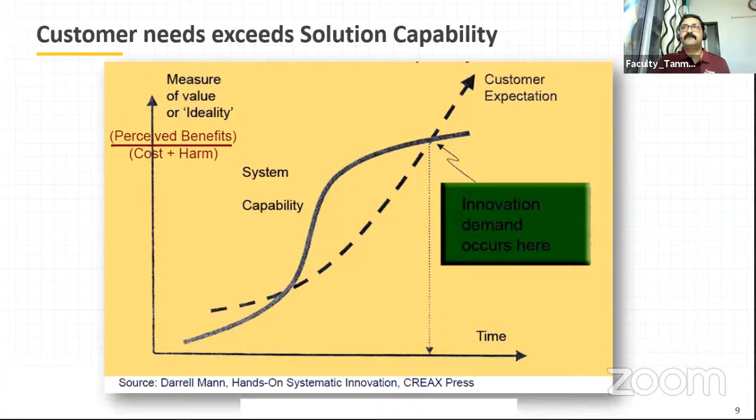And this is what happens - the customer expectation always grows that the product will be continuously improving. But normally what happens is that overall the quality of the product declines or flattens out over the period of time. This is where we need innovation, that second kick or second booster of the rocket, to give the next thrust to go to the next level with that innovation. So innovation is extremely important everywhere. Every company is going behind innovation and new digital technologies.

So product development process is, we have to first of all, till now, is there any question, Deepak sir? Am I going too fast or too slow? Yeah, it's okay, sir.

Product development process basically needs to start with a customer viewpoint: what is their perception about a product, what kind of improvement they want. This is a market study that needs to be done, initially inspiring the visioning of a new product. Then we also need to understand if I create this product, whether it will sell in the market.

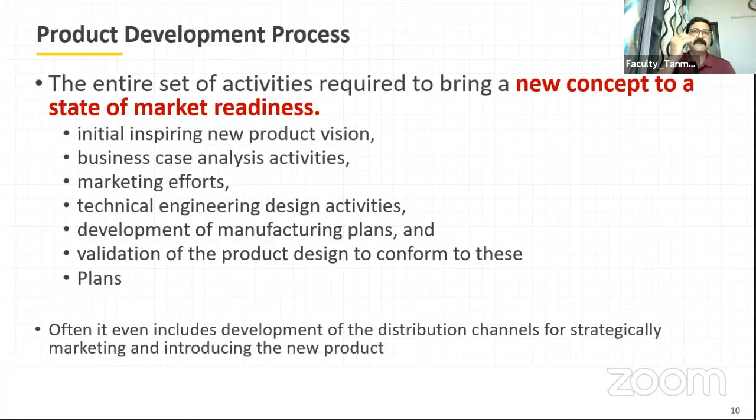That is the business case and analysis activities. Then we need to understand what kind of marketing efforts we need to put behind it to sell this product. Then obviously the technical engineering and design activities, that is the core of any product development. And obviously the manufacturing plan - whatever I dream, it has to be manufacturable. So the manufacturing plan, product design validation, and everything comes in. Those are some granularized points for product development.

Now, higher quality at lower cost. Quality has to be absolutely 100%, that is by default. Everybody wants quality to be absolutely default, 100% quality, but the cost also has to be very, very competitive. So that is the second point.

And the third one is that you cannot take 2 years or 3 years to meet all those criteria - it also has to be very, very time bound. So within 6 months a new car has to come out. These are all very challenging scenarios for a company to sustain in the market. So what do you do?

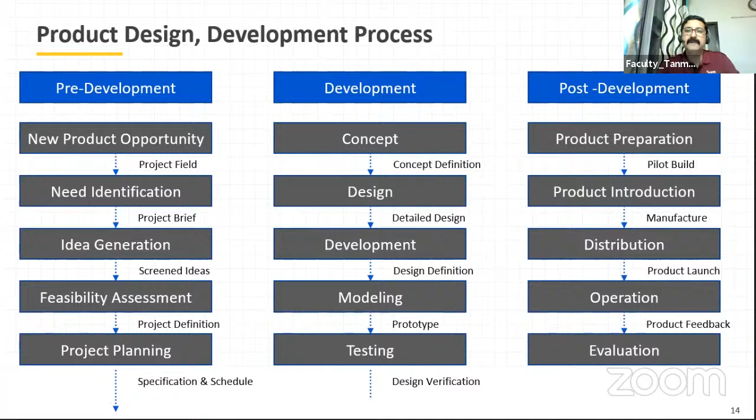Till now there's a lot of text I'm just reading. I have a few beautiful videos coming up which will make people a little interested in this.

Now this slide is also very important, it's a very favorite slide for me: this rising sun casts the longest shadow. Where we need to put our maximum effort in the entire product development cycle is the first design phase.

The more robust design we do in CAD, CAE, and the more time we spend on our drawing board to finalize with iterations to make sure our design is robust, the less money we will spend in prototyping or physical testing or field failure and other future problems.

Just like building a kid's career or his foundations - the more time you spend with him during his initial 7 or 10 years period, that builds his mind. That creates a kid's future.

Similarly, for a product, the initial design stage, the drawing board and the simulation designs - the more time we spend there, the more benefits we will reap in terms of money, facing fewer challenges in the future. Our products will not fail, it will be more robust in the field, fewer customer complaints will come. So this is most important, that in the design phase we have to spend more time, and that is where CAE - computer aided engineering - will come very, very handy.

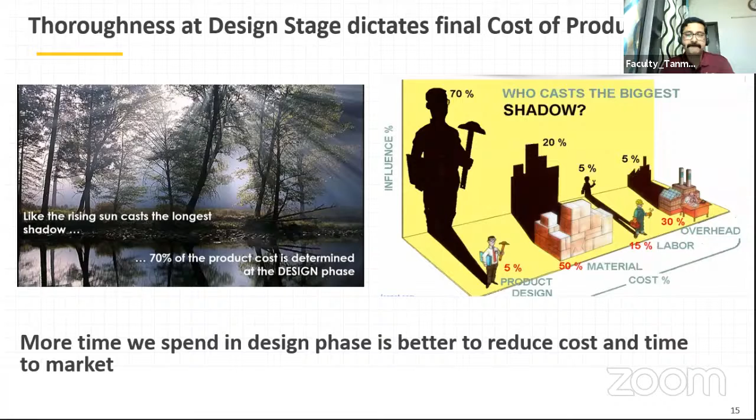Okay, and this entire process is called product lifecycle management. It's kind of an entire cycle. See, I will tell you a very small example.

This entire aeroplane, any kind of Boeing jet or Airbus, doesn't get manufactured in a single facility. One of the components may be the fuselage or the wings. Everything comes from different locations of the world. The entire wings come from Germany. The center portion gets built somewhere in Australia. But everybody is extremely synchronized, so that not even a single millimeter of difference will happen, while all the components come back to the US and get exactly fitted together to make a big aeroplane.

So that is what product lifecycle management is all about - it's a coordination, a collaboration between different teams, allowing teams to work accurately in different locations, and how to reduce effort and money for data creation. PLM is a very important process in the entire product development. It's called product lifecycle management.

And the historical view, how this PLM has evolved over the period of time: 3D CAD analysis in 1995, the first analysis we did.

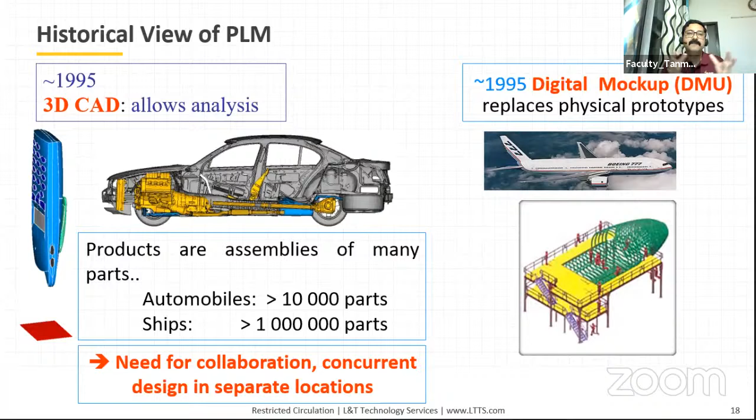We will definitely do the prototyping, we will build this car, but we will not build 50 cars. Previously it used to happen - we used to build 50 cars because we never had the technology. Now we have this technology of virtual validation, where we virtually create a mathematical model and simulate it.

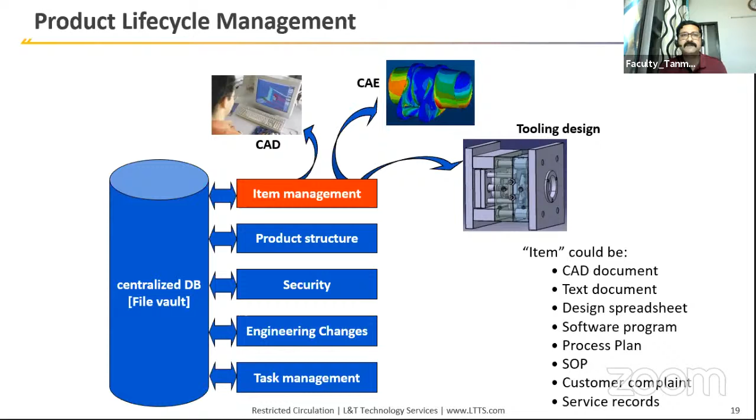Now we have a central server where we have the CAD process, CAE process, and tooling design, everything. In the centralized database, the file vault, it's all secured: item management, product structure, engineering changes, task management. So this entire thing is product lifecycle management.

Deepak sir, till now it is okay, or any question from anyone? Oh, no question, I'll interrupt you. So far it's good. Sure sir. Okay, so I will take one segment here.

Let me take my favorite automotive segment, and I'll try my level best to explain how a product development happens in automotive.

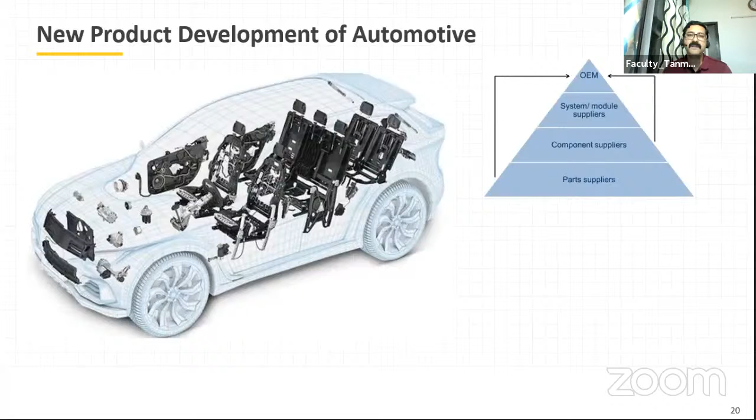In automotive, you can see the bottom of the pyramid is the part suppliers - that is the flattest of all, all the components supplied from tier 3 companies. Then the component suppliers, tier 2 companies. Then the system and module suppliers, the tier 1 companies, and then the OEM. They all get combined or assembled together.

Okay, so it all starts with a beginning, a sketch, ideation - it's a sketch in the drawing board. The designers sketch the model, and with a clay model, they create this car.

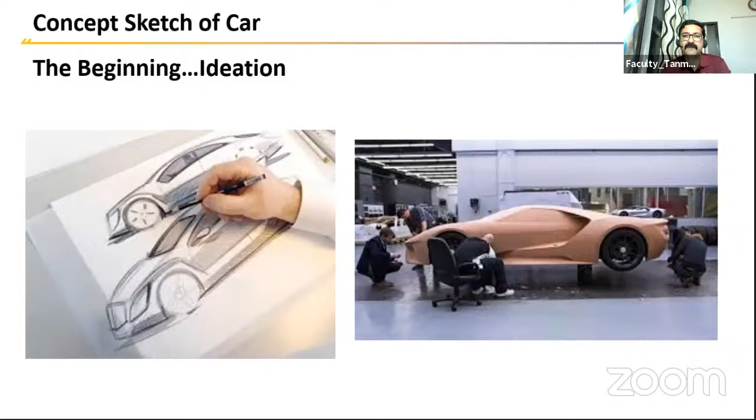After that it goes straightway into the design software - there are a lot of design softwares like SolidWorks, CATIA, Creo. In that they create the Class A surfacing for the entire car, entire model. It's a virtual surface.

Every system is modeled here. You can see the details - the tires, the bonnets, the front end of the car, everything is a completely detailed model.

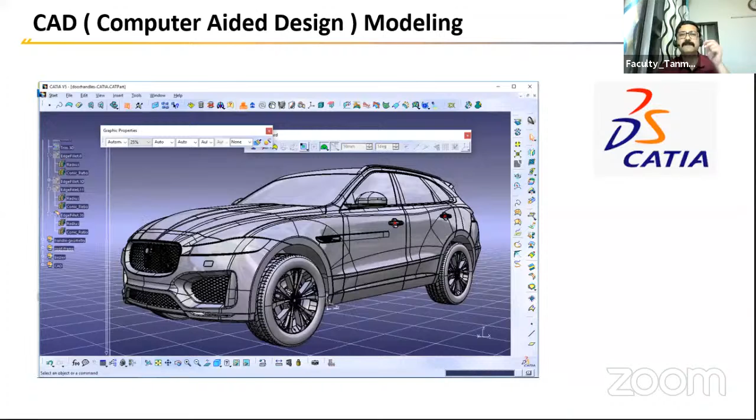So with this particular design, previously what used to happen is they would do some very preliminary analysis and straightway go into prototyping - let us build this car and bang it in the wall, let us test it, what happens, whether it fails, whether it breaks. Jumping directly into a prototype is not a good idea, because it is going to cost a huge amount of money.

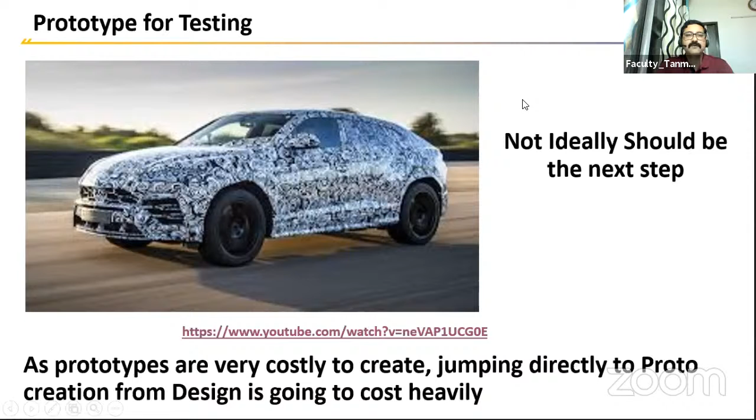You can imagine creating this Jaguar car - creating a Jaguar is almost like spending 80 lakhs to 1 crore rupees. And however many times you want to do testing, you have to spend that much money. So instead of that, I'll just go to a crash testing video over here. Let me see whether it is visible to all of you.

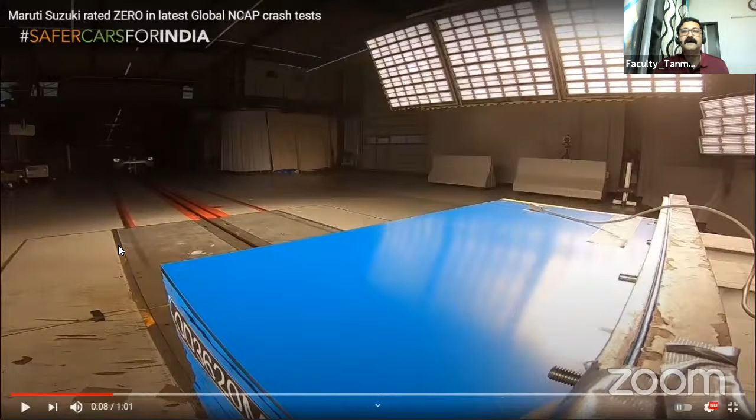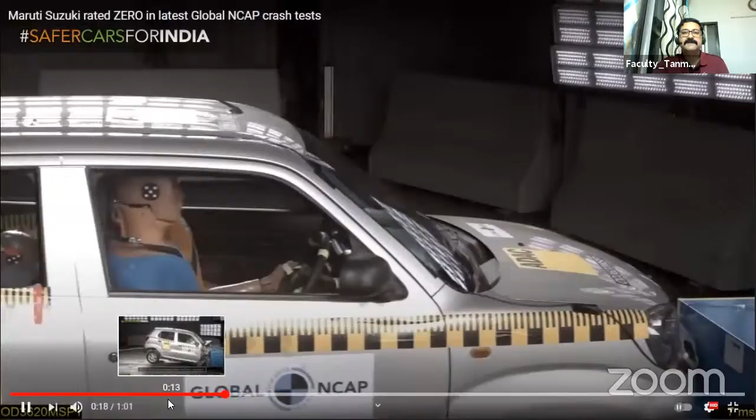This is an offset barrier test. You can see here, this is an offset barrier. It's not a full frontal test with all the dummies, and you can see the airbag deploying.

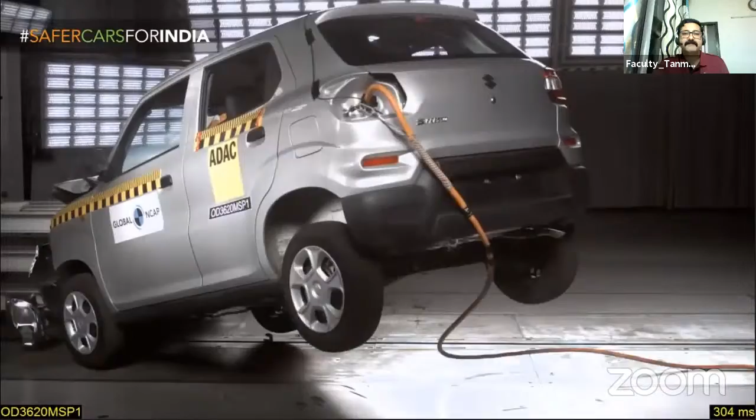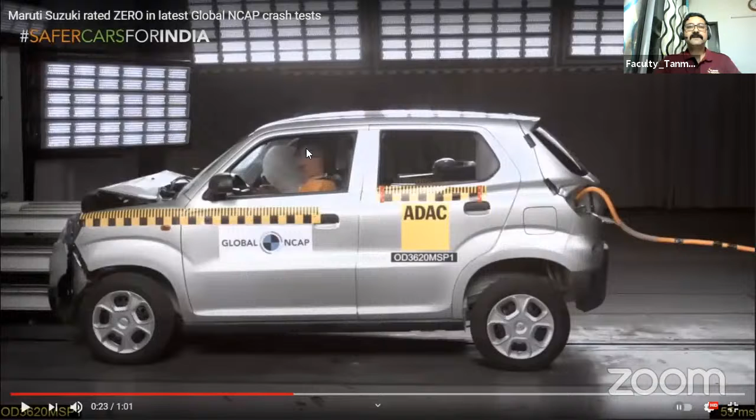So this is how the things are all tested, and these dummies have accelerometers, the output points. We take the head injury criteria and the accelerations from the ribs, neck and abdomen - everywhere the injury is taken out from here. You can see all those points, the displacement and the injury criteria, everything is output from this particular test. This is how an actual physical test happens.

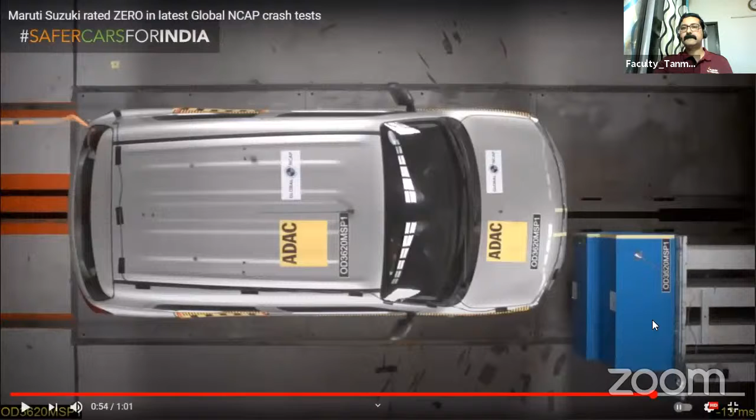So this is a child dummy. You can see this is an offset barrier, right? This barrier is not full frontal, because these are the most frequent accidents that happen - whenever two cars see each other, they try to deviate from each other. That is why this offset barrier is the most frequent impact that happens on the road, and it's also most severe, because it takes only one portion of the car. The rest of the car is not taking any energy - all the energy is being absorbed by this particular portion. That is why it is an extremely severe load case.

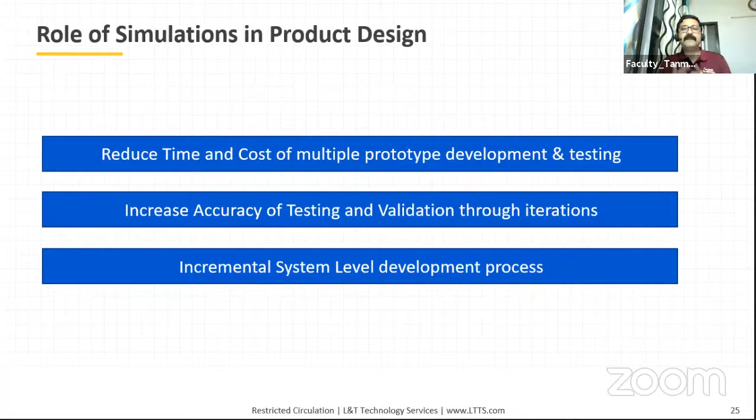After that, they will create a prototype. By that, they would have saved almost 20-30 prototypes, almost 3-4 crores of rupees they have saved. And they can do it in a very quick period of time because building a prototype is very difficult.

So initial design, then simulation and validation. Designers and validation engineers talk to each other. They have to be absolutely collaborative, because designers give a design to a CAE engineer who validates that model, suggests changes to the design engineer who quickly incorporates those changes into the model, and again gives it back to the simulation engineer. So this kind of to and fro collaborative environment generates a robust design, and then they finally go for physical testing and prototype.

So that is why we call it product development powered by simulation.

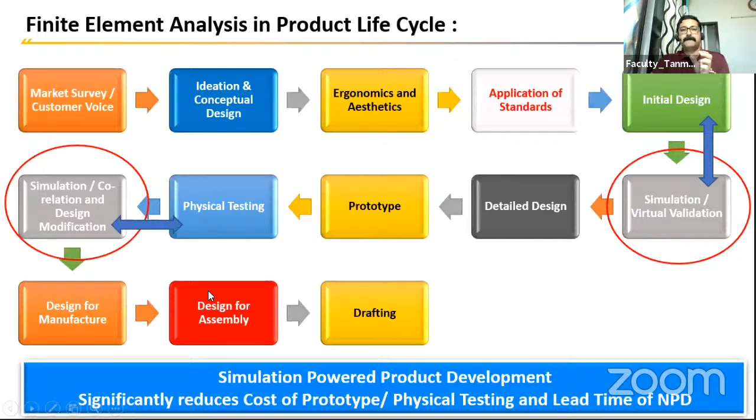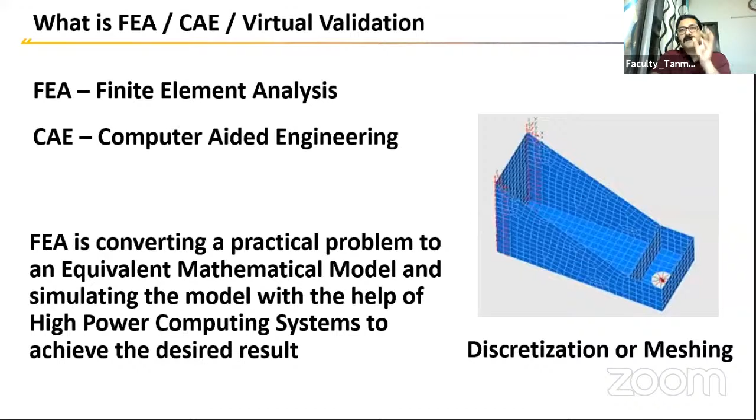So finite element analysis - see this particular bracket, it has been beautifully discretized into small elements. These are all called elements. There is different software available to create those elements, called HyperMesh. Many of you might have heard about it. It's a very popular technology. Automotive industries have been using it for the last 20 years - extremely popular technology, this FEA technology, to create a mathematical model of a physical object and simulate it with all the

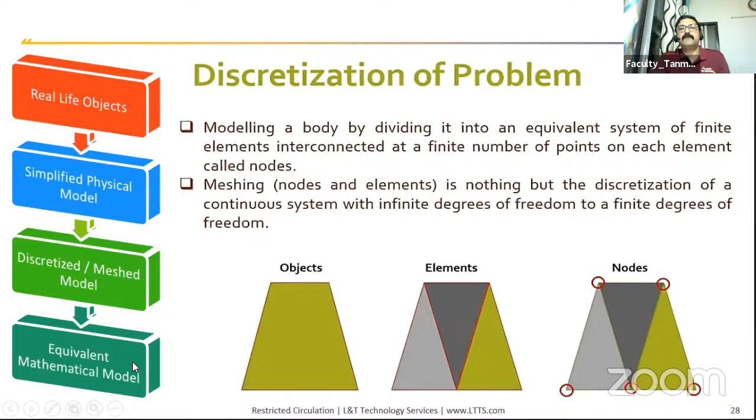reality level loads and boundary conditions, and simulate the reality of how this particular component will behave. So real life objects, physics simplified into a physical model - that is the CAD data, and from the CAD data we discretize into a meshed model, an equivalent mathematical model. Not going too deep into technical details here. So this is how a car is built, meshed into hypermesh - you can see here hypermesh. This is how a car is built in a hypermesh environment for the rest of the simulations.

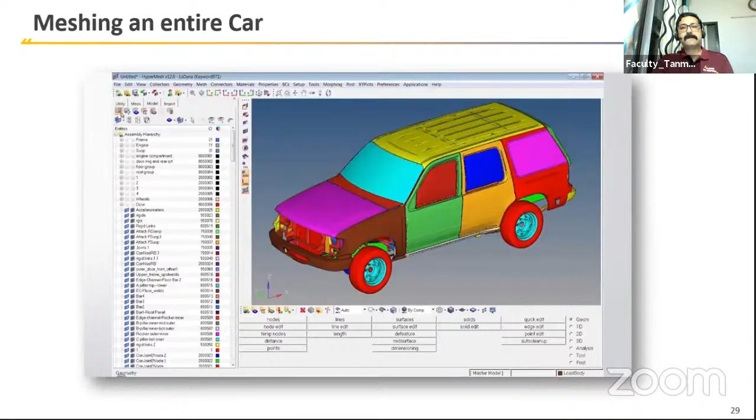Okay, till now any questions from anyone? No, it is going well. Okay sir, thank you sir.

So now for FEA, for the simulations, what are the different types of very common simulations? There are n number of simulations we can actually do - linear static analysis, all different types of simulations we do. But the very favorite, well known simulations are correlated with the familiar failures that we see around us, like fatigue simulations. Fatigue simulation is what? It's repetitive loading. When a car goes through repetitive ditches, it does a repetitive loading, and you can see that if you

take a simple metal plate and do this repeatedly, it will easily break. This is called repetitive loading. So this repetitive loading accelerates the failure. We simulate a fatigue simulation and try to understand what is the life of the component. There are two different types of fatigue - one is low cycle fatigue, one is high cycle fatigue. Normally in our life, what we see is low cycle fatigue. In that, the failure aggravates, it accelerates.

In normal conditions our component doesn't fail, nothing fails, but if it experiences repetitive loading, a fatigue loading, it fails easily. So we have to simulate that, and we have to restrict that.

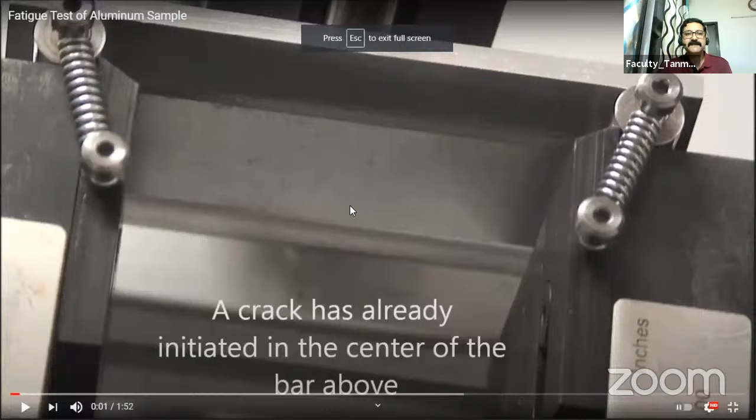Fatigue. So see here, this is a repetitive loading. You can see here a crack will generate in between. A crack is getting generated here because of this repetitive loading on the side. Otherwise, nothing would have happened to this particular bar. But because of this repetitive loading, this crack is getting generated, and finally this component will fail. So this is called fatigue loading.

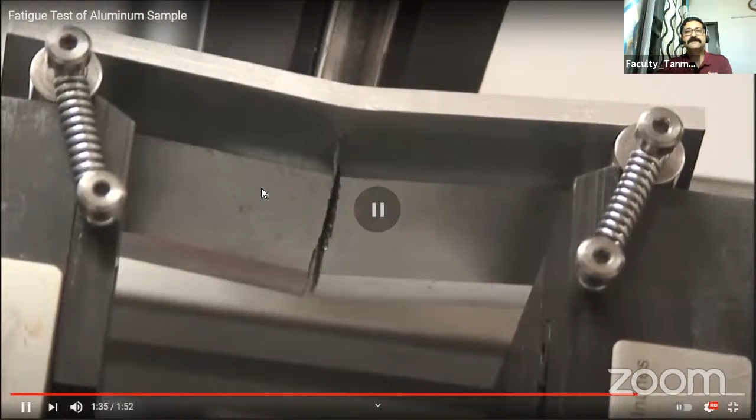Similarly, there is vibration. You can see vibrations in many instances. A tuning fork is a very common example of vibrations—it vibrates. An engine vibrates too. In any car, whatever noise comes into the car, powertrain or engine is the major source of vibration. So we have to reduce vibration using dampers. You can see some rubber dampers at the bottom of the washing machine creating a damping activity, so it damps down the vibration. Those are some of the activities we do in vibration analysis.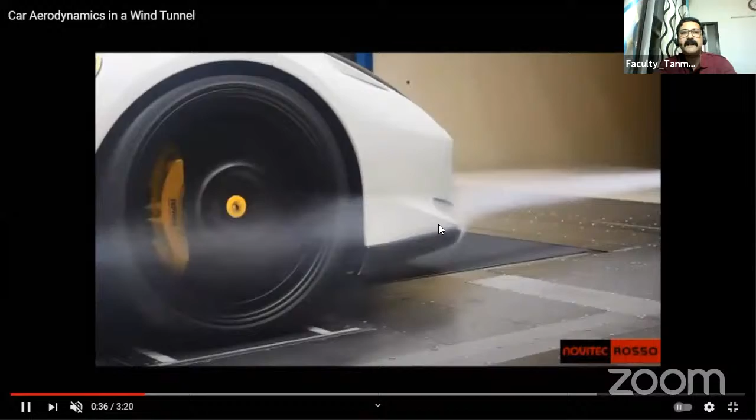This is a wind tunnel test, actually, being done on a particular car, a sports car, just to see how aerodynamic their design is. This is called computational fluid dynamics. There are many other CFD analyses we can do, for example underhood thermal analysis. If you open the hood of the car, the engine gets very much heated, so we need to do an underhood thermal analysis. This is a kind of wind tunnel test to check the aerodynamics of a car.

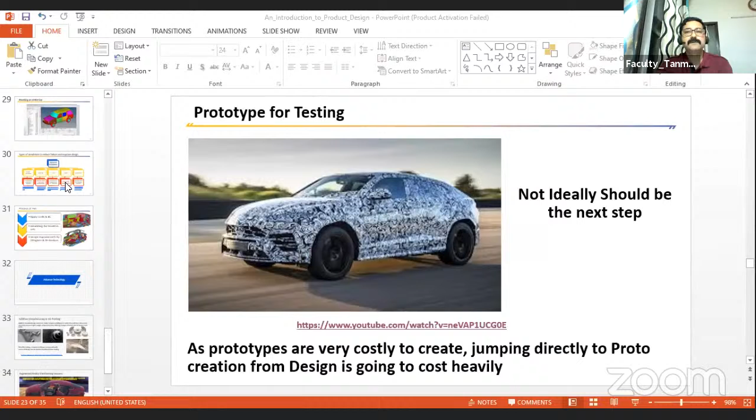Now going back to my PPT. Second one is crash—I have already shown you the crash test that happens, high speed crash impact. And the fifth one is very important: optimization. Everybody likes to make an over-designed component. Anybody has any question?

Okay, can I proceed? Yeah, go ahead. Optimization—so I was talking about optimization. See, for any component or any product, everybody used to make it an over-designed product so that it never fails. We can make it a very thick plate—suppose a car, the side of the car, we can make it a very thick plated car. But it will attract a lot of cost, it will attract weight, and it will reduce your fuel efficiency.

So how to optimize? Have you ever seen Ducati motorcycles? The center structure has some holes inside. Actually, intentionally they have taken out material from a particular piece of metal, so as to make it equally robust yet less heavy. Through those particular lines, the load paths travel—you can see that bridge, right? I'll show you here in this document.

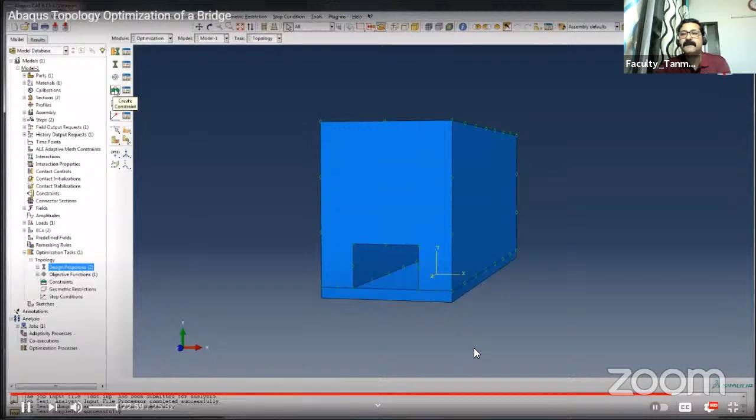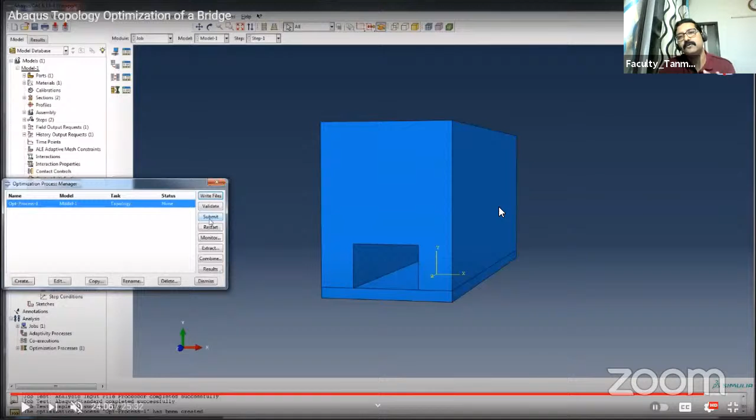This is Abaqus topology optimization. You can see, first of all, they have taken an entire block, a piece, and after that they are optimizing it to make a bridge. See this—this is finally the structure. It comes out like this because the entire material is not needed. The load is flowing through only those paths where you need material. So the software has taken out all the unnecessary material and kept it only wherever necessary. That is how our optimization analysis is very important.

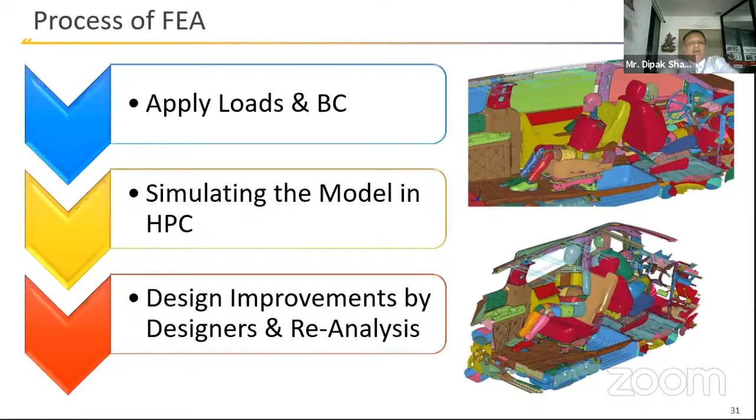So I will just, if I have another 5 minutes of time to cover - I think it's already 7:25 - I'll go to a couple of advanced technologies that people are adopting nowadays. You guys might have definitely heard about it. It's called additive manufacturing, or 3D printing.

So additive manufacturing is that multiple components are being - previously we used to have, you see this plane blade right here - this blade previously used to have 1000 components, with welds, bolts, nuts, everything inside it, and any bolt, nut, hole, anything, those are all stress initiators. From there it will crack. So now what they're doing is manufacturing the entire blade as a single piece through 3D printing technology.

You can see this engine, an aerospace engine - it's all 3D printing technology. So any kind of complex geometry, they will do it through 3D printing. This is one great example of advanced manufacturing that they are adopting very frequently nowadays.

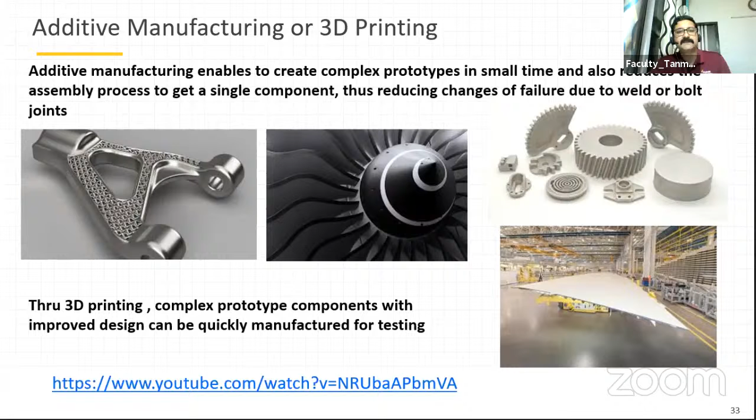Okay, I have one more very small sweet video. Sir, my screen sharing is visible? Hello, yeah yeah, hello.

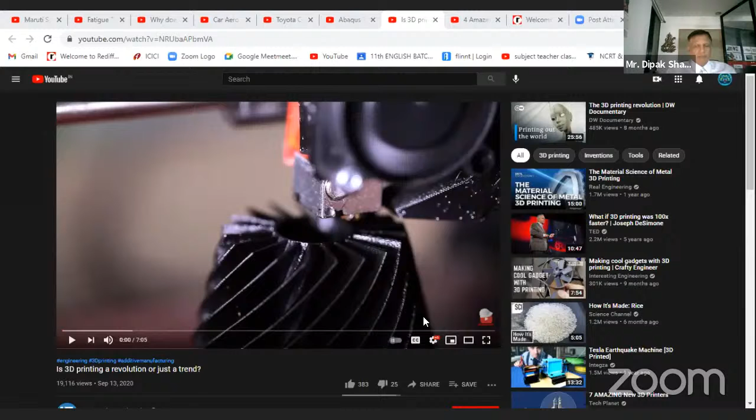What do NASA, McLaren, and the restaurant Sushi Singularity have in common? They have all incorporated 3D printing or additive manufacturing into their work in some form or another.

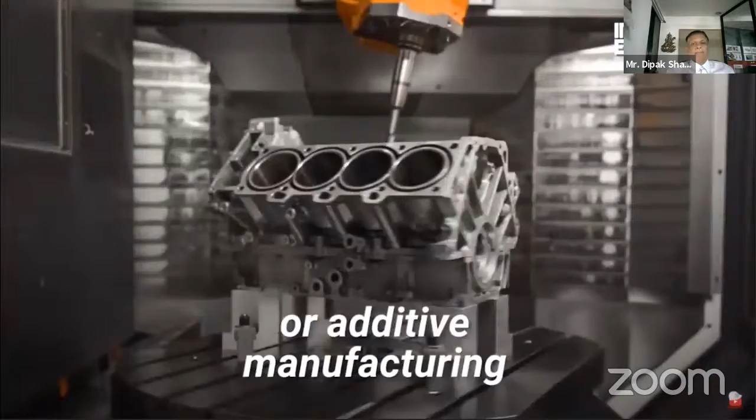Sir, you can hear the sound? Yeah yeah, okay sir, okay sir.

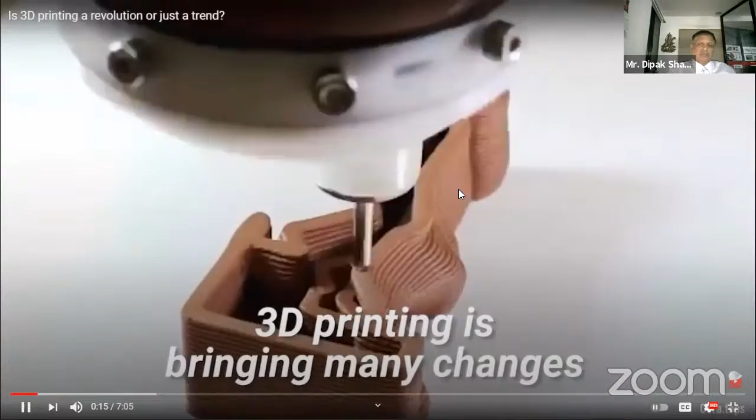3D printing is bringing many changes to a number of important industries. Companies have begun printing everything from fully functioning cars to Michelin-starred dinners. Medical research institutions have even experimented with printing functioning body parts, paralleling some of our favorite science fiction shows.

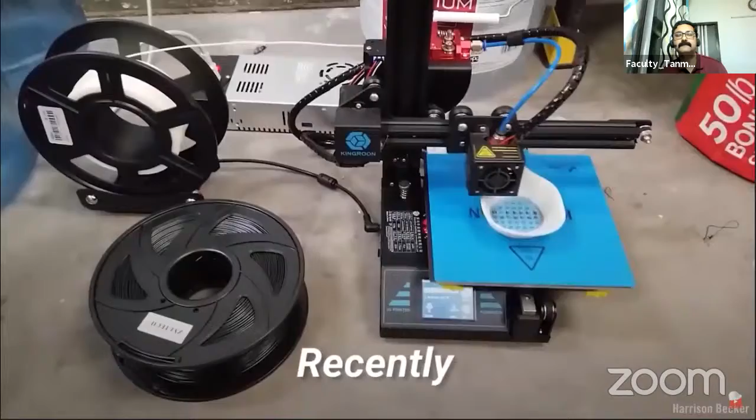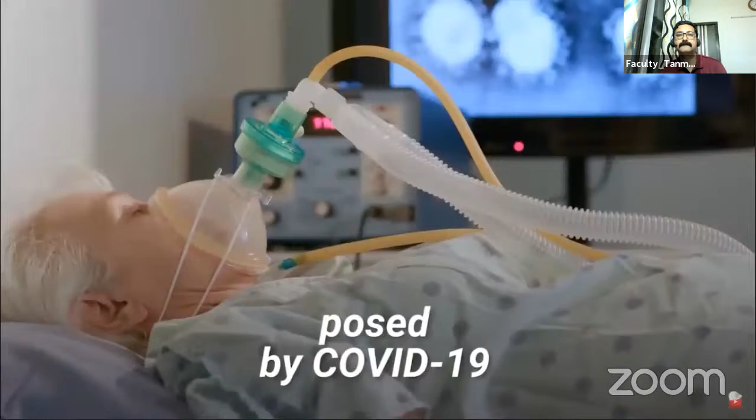Recently, additive manufacturing showcased its practical versatility, becoming a powerful tool in tackling some of the unprecedented challenges posed by COVID-19, helping to supply health workers with personal protective equipment and patients with ventilators.

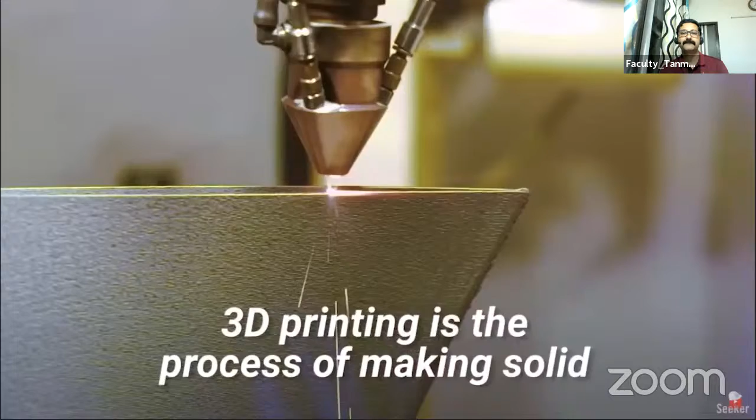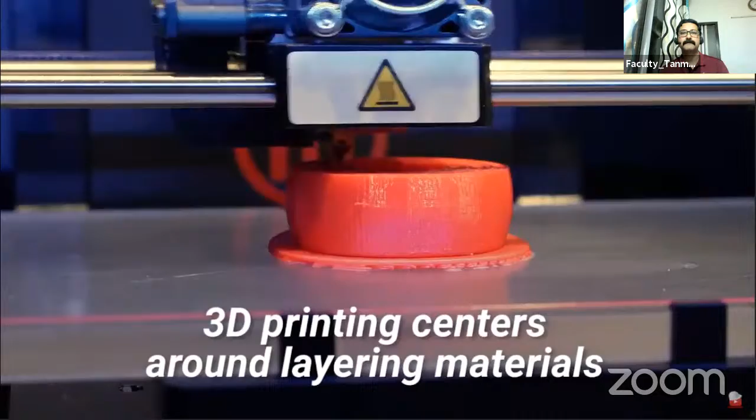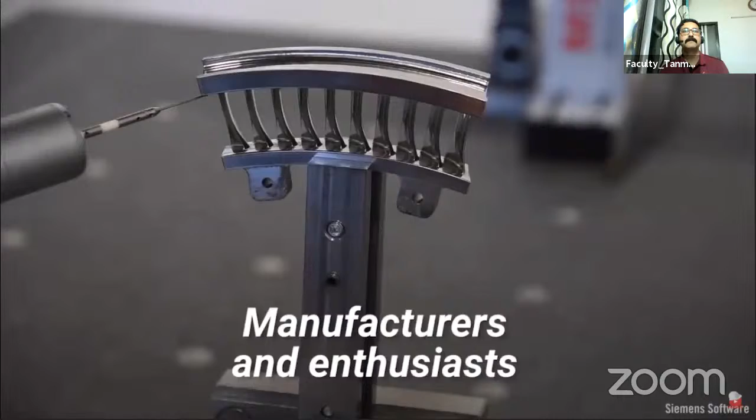So is the 3D printing revolution here to stay, or is it merely a trend? For the uninitiated, 3D printing is the process of making solid three-dimensional objects from a digital file, also called additive manufacturing. 3D printing centers around layering materials like plastics, composites, or biomaterials to create objects that range in shape, size, rigidity, and color. Manufacturers and enthusiasts can print aluminum parts, human tissue, carbon fiber tools, thermoplastic figurines, and even dental models. There are currently 9 basic types of 3D printing, with SLA, FDM, and SLS printing being the most common.

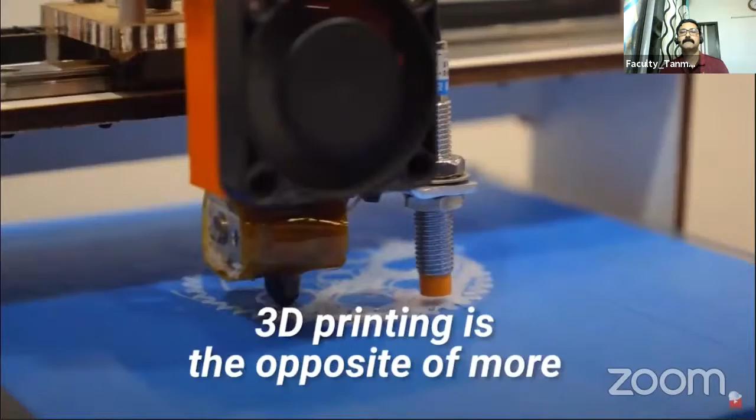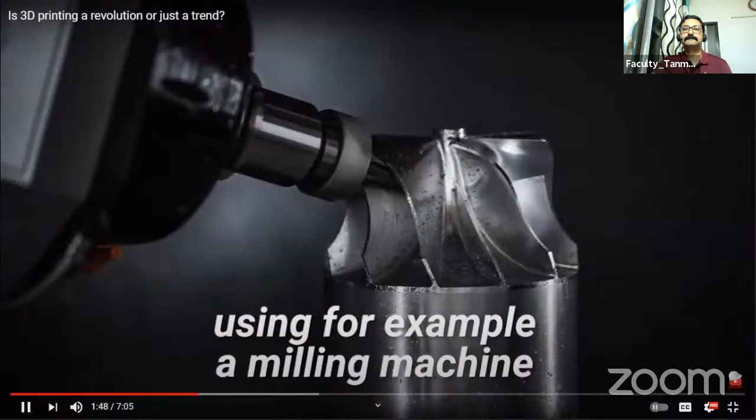3D printing is the opposite of more traditional subtractive manufacturing, which usually involves cutting the final object out of a piece of metal or plastic, using, for example, a milling machine. The first 3D printing technologies may...

Shall I let it continue, or we will stop? Yeah, I think this is good enough.

Okay, there is one lady who has asked the question, Shivani Madam. She has sent - she must be watching it on YouTube. So the people who are on YouTube, sure they can send the question on my mobile. Sure, so sir, she said that what is the strength of the 3D printed product compared to the manufactured product?

Absolutely, that's a good question. See, a 3D printed product is a kind of single product, and it is created out of metal or plastic, anything. So I believe it is more robust with respect to other joint products. As I also told you, there are many benefits of 3D printing. One is that it can print complex geometries that are not possible by any other manufacturing technology. So any kind of design you can conceive of can definitely be made through 3D printing, and structurally it is more robust than combining 2-3 components with bolts, nuts, weldings, because those areas are stress initiators and will fail, rather than a 3D printed component.

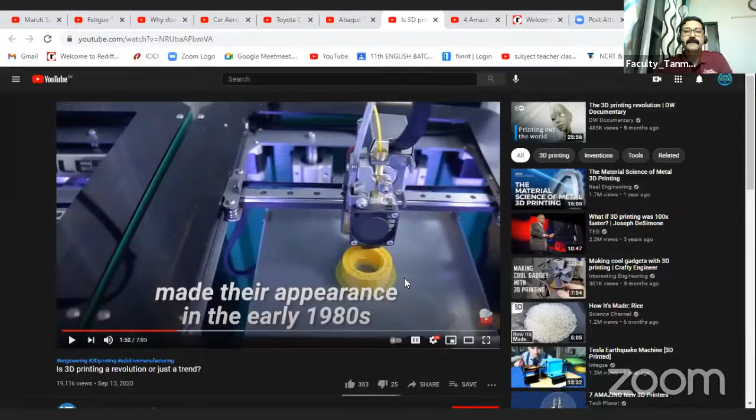You go ahead with the video. I can continue, sir. Yeah, you can continue quickly. Let's see what it is.

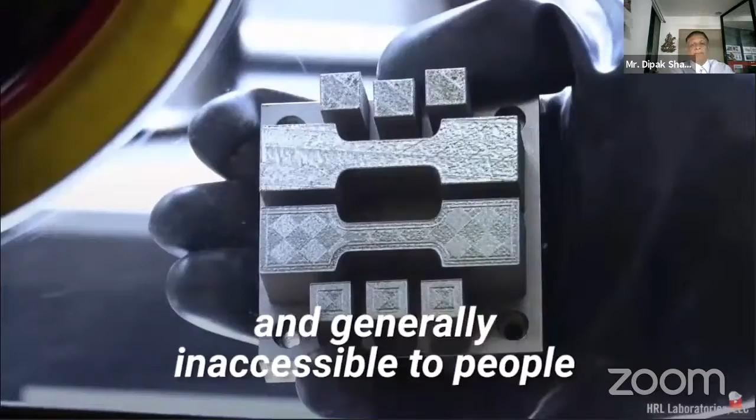3D printers made their appearance in the early 1980s. They were expensive, difficult to use, and generally inaccessible to people who lack specialized training. Yet 3D printing has been a common trope in science fiction, appearing as early as the 60s in the work of Arthur C. Clarke and sporadically in Hollywood classics over the decades.

People are using 3D printing now for printing cakes. You can have a cake made as a small model of yourself. They take the raster image through various cameras, form a 3D model of yours, and cut a cake.

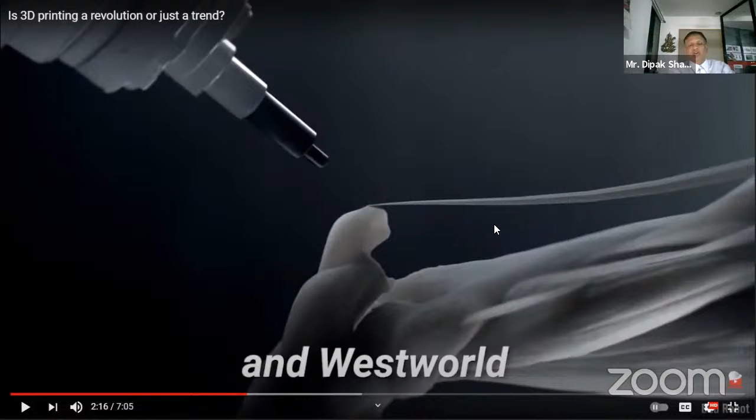True, sir. You can see this, lost bone and some of the small portion of the bone. I think this is very difficult to manufacture otherwise.

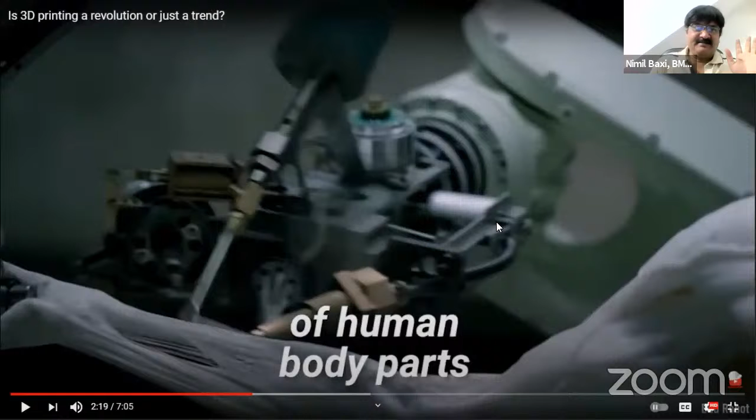Yeah, so it's a wonderful technology. Even predicted the printing of... I think the major question nowadays is 3D printing is very easy - you can just design something and transfer it into the hardware side.

But what about the profiling part? If you have some existing product which I want to copy without designing into CAD CAM, is it possible just with profiling? Earlier days we were using analog type of profiling, just put it near to the object, and based on the profiling it's set, and then with some geometrical part we are designing.

So what about the profiling? Very important part, good question, sir. I'll take that question. Right now there is a technology called FARO Arm, an infrared technology.

If they just roll it out, that FARO laser technology over the particular component, it will automatically capture the entire geometry of a component and create a CAD model. Through that CAD model, you can replicate something. So that's a FARO Arm.

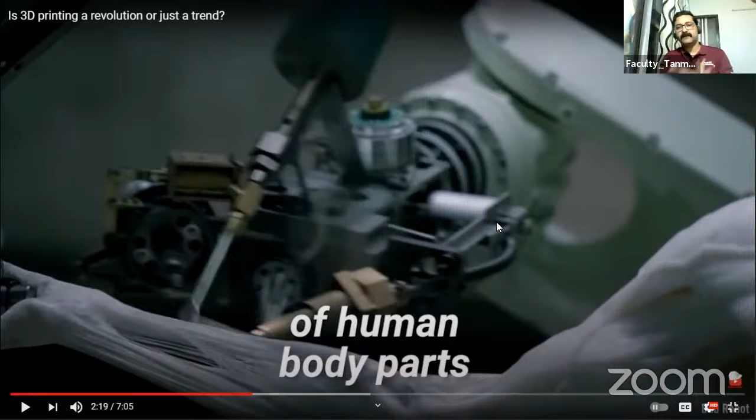FARO Arm is called an arm because it's a robotic arm with a FARO probe, and from that probe there is laser technology. Once you roll over the entire particular model, it captures the entire image of that component and throws out a kind of CAD model, and from that CAD model you can use it as an input for 3D modeling.

3D printing, okay. I think it's more accurate if you are using something laser-based.

Nimil Bhai, today in a typical organization, if you look at 25, 30 years back or maybe 10 years back, they had so many forms - leave form, expenses form - everything has gone. Now what you do is print whatever form you want. There is a soft copy available, take the sign and do it. Even people now don't print also.

They do it online. So similarly today we see a lot of people selling automobile components - a shop selling automobile components. Maybe 2 or 3 years down the line, you will see those shops vanished, and he'll be sitting with a 3D printer and ask you what is the model of your car, which year, what component you want, what is the component number. He will call up that component, print it, and give it to you.

Yes sir, like people are printing leave forms and everything. Now there is no need - earlier there was a store department available where we used to go and take out the part. Now those things have gone. So 3D printing is going to bring a revolution, and people will have 3D printing at home.

Today everybody sees laser printers - once upon a time considered a luxury, and today it is available at everybody's house. Only DTP and high-end people used to keep them. Similarly, 3D printing cost has also gone down. So it's going to be the technology of tomorrow.

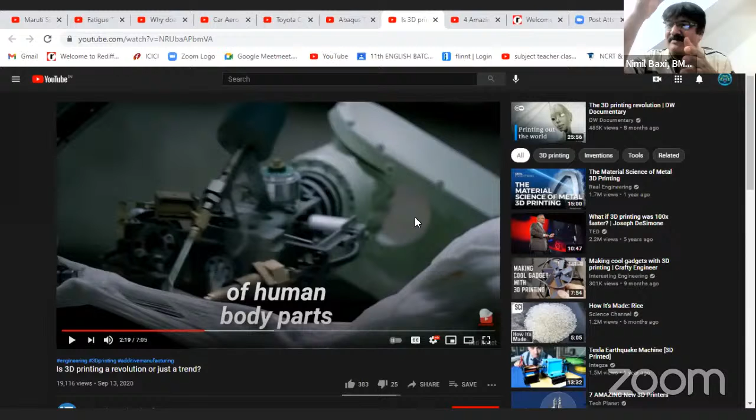I have dug in my house and found a 1,000 years old Ganpati Murti, very pavitra (sacred) murti, and it's something unique. I want to replicate the same kind of Ganesh Murti. The Faro arm will decide... because I have seen 99% marketing for the 3D printer side, but what about the source?

Well, it's very easy. One thing, sir, second thing is about the first video - that's a good thing, it will give a clear picture basically. So the Faro arm, you can see here.

Can I share my screen with you? Yeah, yeah, please. We are seeing your screen. Oh, you are already seeing the screen? Okay, sorry sir.

So you can see here, this is a very costly arm that we also have in L&T. This is a Faro arm, a robotic arm, and first of all we need to place it.

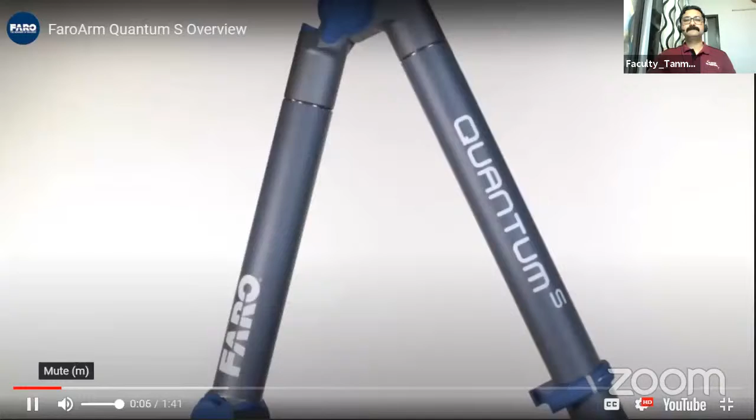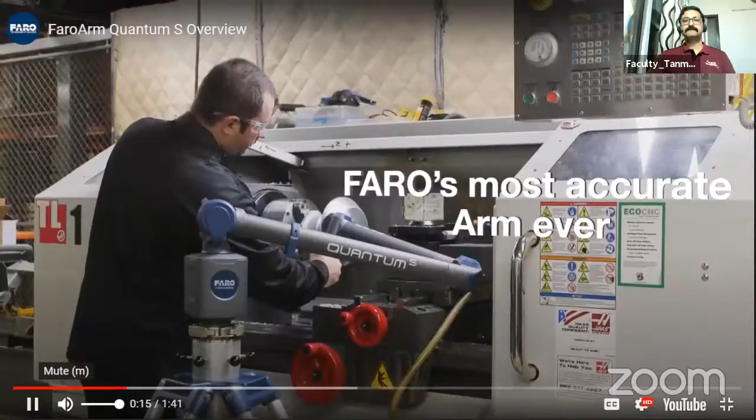The FaroArm Quantum S, elevating the value and performance standards for manufacturing inspection and alignment. The Quantum S FaroArm is FARO's most accurate arm ever. It is an industrial-grade metrology device designed for inspection, CAD to part analysis, and reverse engineering applications on parts and assemblies. Exceptional ergonomics - this lady is actually capturing the entire profile of this particular component through this Faro.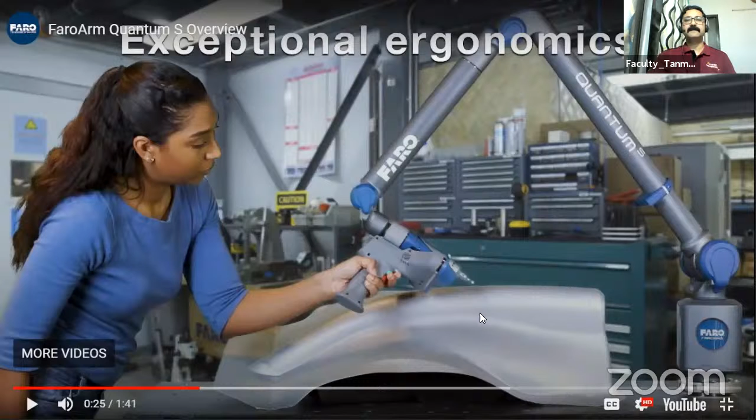You can see this. So it is a point cloud data which basically gets into the system, and from there people build the 3D model, and then print it on the 3D printer. That is the technique, through this particular probe and this arm. She is capturing the entire profile and building a CAD model.

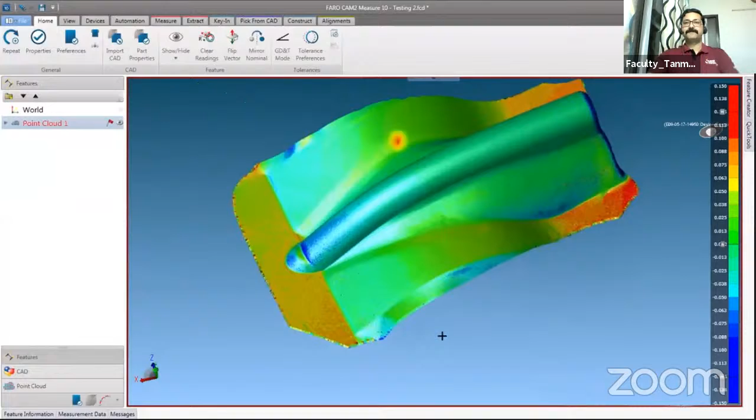Minimize user effort and fatigue. With the FAROBlu Laser Line Probe HD, Quantum integrates the best laser scanner available in the market. See this, this entire model is created now. She has actually captured the entire profile through that Faro arm, so beautifully it has come up.

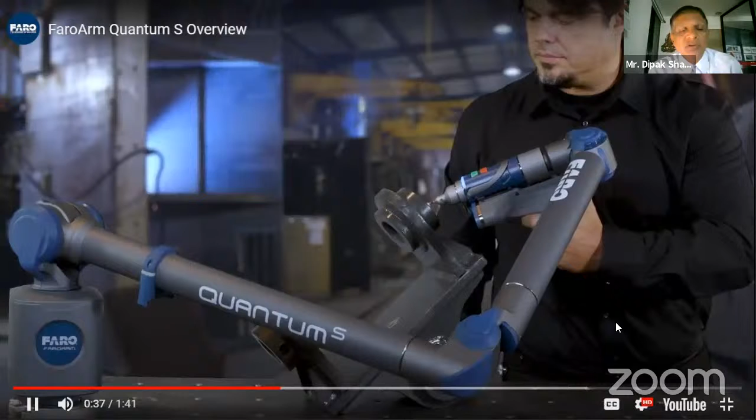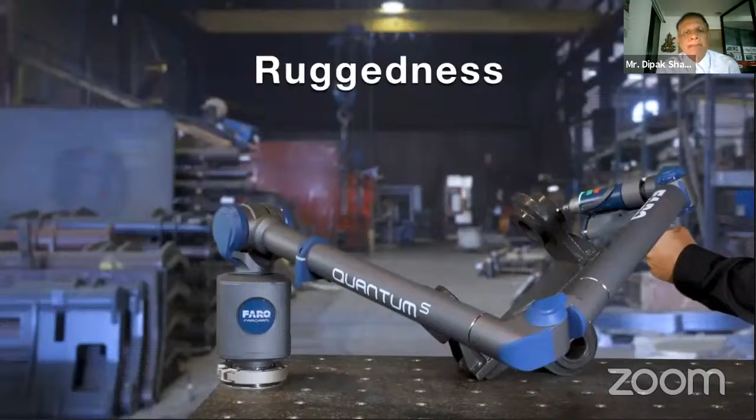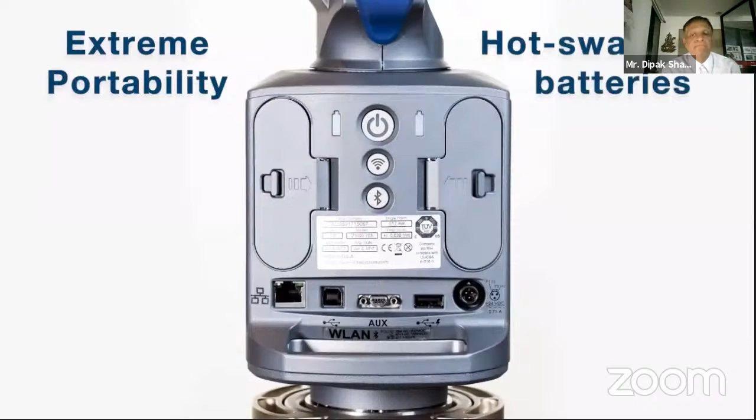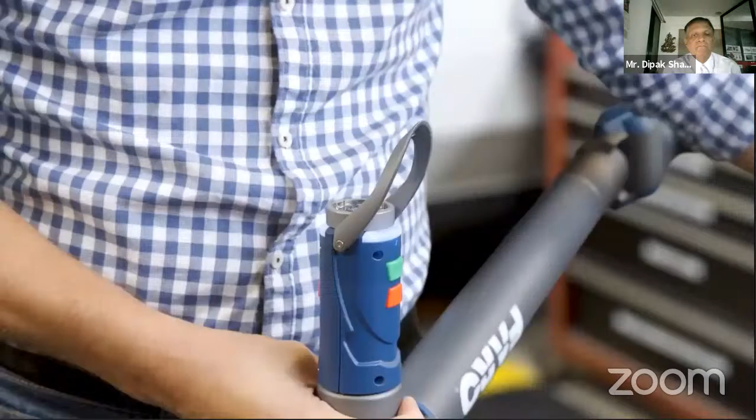Is it touching the component or keeping it away? Yeah, he is touching the component. He's touching it, wherever the measurement is needed.

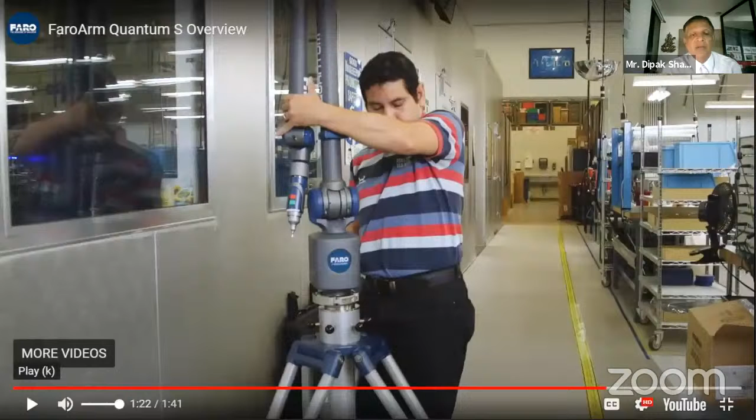Quick and easy setup - what is the accuracy level? Accuracy is very high, sir, it could be in microns. Okay, so it's a laser measuring device, no? Basically if a laser is there, then there's a possibility of high precision.

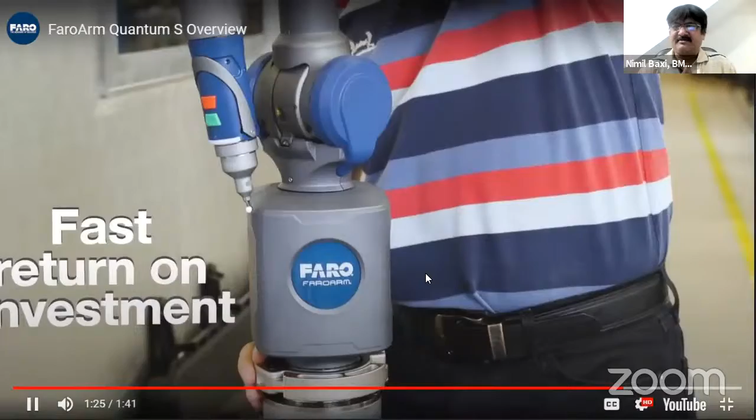Optimize your return on investment in production. In Surat, specifically in the diamond process, a similar kind of technology is used. When we receive the rough diamond from mines, they take a picture with the camera, the camera transfers that picture, and software decides how many diamonds we can adjust in this rough diamond part, and then they do the planning side with the laser.

Right sir, that's very safe. But thinking about what you showed earlier, that's about the crash test - I am very happy that in India, at least we have started this kind of technology, because I think 15-20 years back, we were not doing any crash tests.

At the same time, many people wish that after buying a car, they use a 2-inch thick guard in front of it. Looking at this crash test, if somebody uses the guard, whether it's harmful or saving life - that only happens in India, sir, because that guard is put to save his own car for some small impact, not for a high performance impact. The impacts are such that only the interior of the car is designed to absorb energies. The more energy the front portion of the car absorbs, the less energy gets transmitted to the rear compartments.